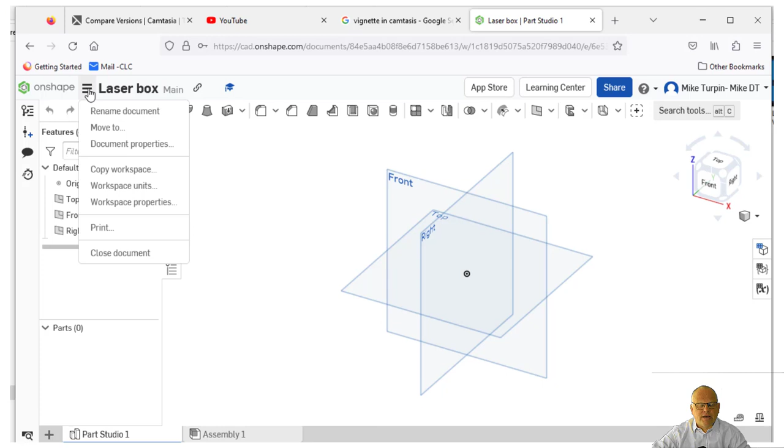Right, so I'm not going to do this as an introduction to Onshape. This is quite basic, you'll be able to follow along if you've used Onshape before. Just one thing that my students often get wrong is make sure your units of measurement are correct, and if you're not sure, you can click on those three little lines there and go to workspace units and make sure that you're working in millimeters. Anything else in there you might change later on, but for me that's the key bit, and then green tick it.

Right, so the first thing that we're going to do is look at our work planes, and I'm going to do a box with a drawer and a lid is what I'm thinking today. So I'm going to choose my work plane for my starting point, which is going to be my base. So I'll go sketch, I'm going to use the top work plane, select that, and then press N for normal, which means that I'm looking straight at it.

Now I'm going to draw a rectangle, so because I'm in a sketch, my sketch tools become available. I'm going to choose a rectangle, click and drag it out. Now again, I can set my dimensions as I do it. So 200, press enter, then the next one 150 and press enter. Let's have a look at that. 200 by 150, it's alright. I'm actually going to reduce that down. I'm going to click on that. Oh, sorry.

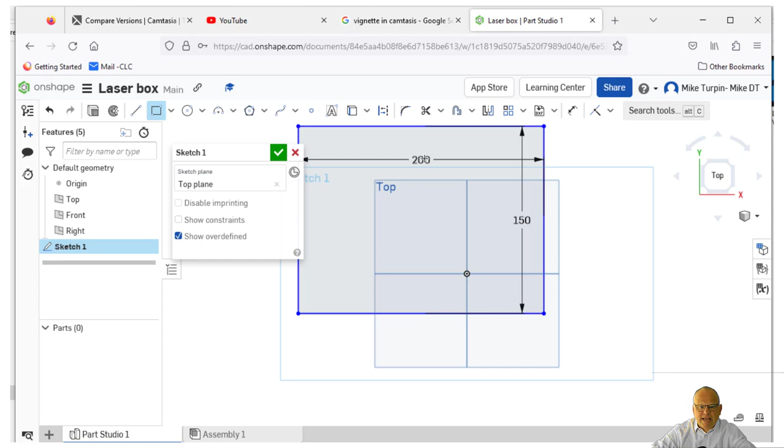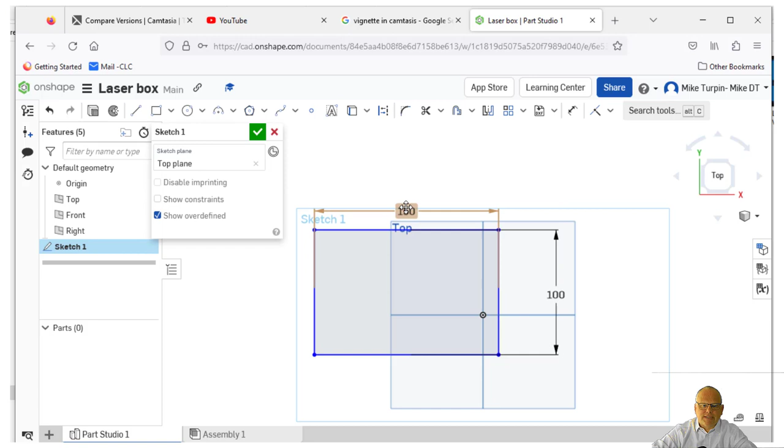I've looked at that and thought, do you know what, I don't like that, that's already too big. So again, within the tools, I can click on it and make that one 150, press enter, and make that one 100 and press enter. So I'm using the parametric tools and the dimensioning tools to get my box size right. I'm going to work very small. I'm imagining this to be some sort of storage for USB devices or a few coins or something like that. So 150 wide by 100 tall, and I'm going to green tick that.

Now what that's given me is a sketch on the left hand side in the model tree. Normally I don't bother naming my sketches, I'm a little bit lazy like that, but today I'm going to. I'm going to right click on it, rename, and call that base and press enter. So I've now got a sketch called base, and that's going to be important in terms of outputting for laser later on, but I'll explain that when we come to it.

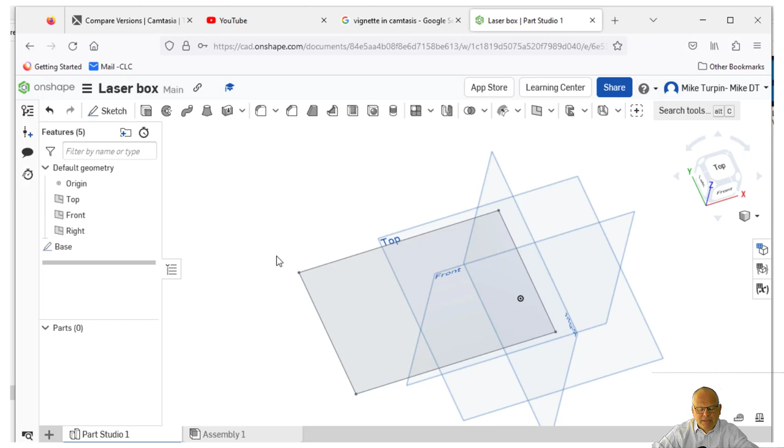Now because I'm imagining this to be 3mm MDF, which is a really good prototyping material for laser cutting, I'm going to use a tab building process. So I'm going to have slots and tabs that fit together. Now if I want the interior of my box to be 150 by 100, what I actually need to do is make my sides probably slightly larger than that. So I need to double check what I'm doing and think about your measurements a little bit.

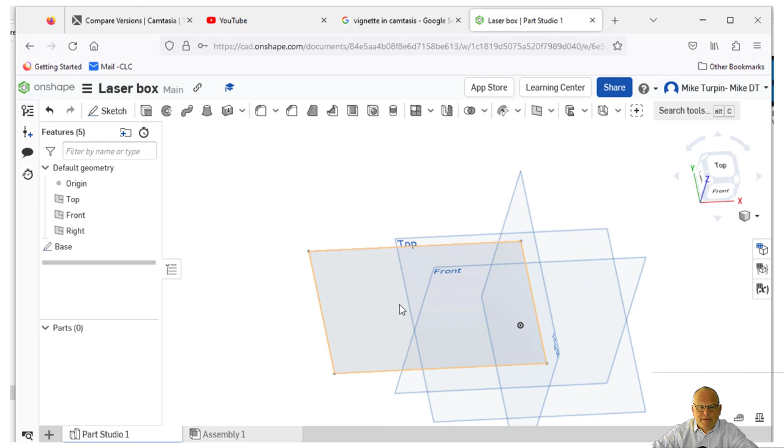Okay, so what I'm going to do, I'm going to go back into my base sketch, I'm going to go edit, I'm going to go N for normal, so I'm viewing straight on, and now I'm going to put some tabs into it. Now my preference today is going to be that I'm going to put tabs inside it. I'm going to draw it rather than talk about it.

Okay, so I'm going to actually click and draw a line in and draw a line out. Now there's a couple of ways of doing this. I was kind of mulling over the best way, but I'm going to do it this way. Now if I cut in my 150 and then I put a wall thickness in there, it's going to get a little bit smaller. The dimensions of my objects are going to shrink. If I want the outside to be 150, then I need to inset it. So it takes a minute to think about that, but basically all of my slots are going to be 3mm. I'm going to choose to come inside for simplicity today.

So I've drawn this rectangle, and I'm going to use my dimensioning tool to just come in and type 3. 3mm is the thickness of the material. You'll notice at the moment that I haven't put a dimension here. And then I'm going to do the same thing. Click, make sure I'm running at 90 degrees down there. Right click to escape my line. So I'm using my right mouse button. If I'm in the middle of using a tool, I can right mouse click out of it. 3 and press enter. So I've now got 2 steps, if you like.

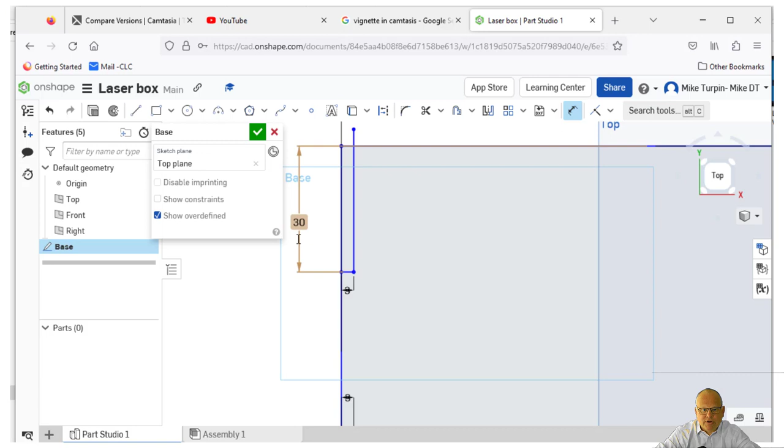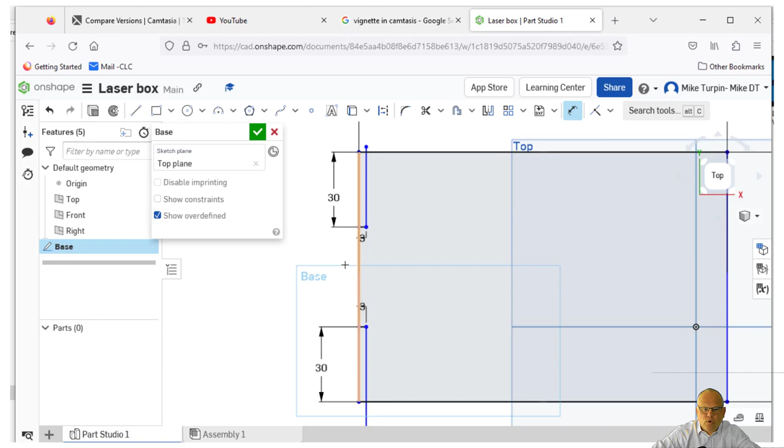I'm going to come down onto this one, dimensioning tool, click on that line, click on that line, and make that 30. So what I've got is a box with 2 slots which are 30 and 30. Now if I put another dimension on here, what you'll hopefully see, between that one and that one, is that we've got a whole number, no small points, and it's a grayed out one. That means that it's a driven dimension. So if I change the size of those slots, that will change automatically, driven by what's happening around it.

Now, a couple of ways I could do things. I could mirror that over on the right hand side, but for me, I think it's just as easy to do it this way. Now, what you might notice, if I come over to here, it hovers and it gives me a constraint that's going to lock it into position with that one. I'm going to click and drag in. Look at me enter the data now. 3, enter, click up, and then right click to escape that line. So I actually constrained that line there to be in line with that one there.

We'll do the same thing again. So go back to my line tool, tell the computer what I want to constrain against, click there, so it's locking off against that. Click there, type 3 to enter that number, and now come down. And then escape the line.

Now you might be asking yourself, why aren't I spending time getting my lines not overlapping? I'm actually going to trim this box afterwards to create the shape that I want. I wanted those dimensions, I wanted that 3mm thickness. The rest of it I'm going to trim in a minute using the scissor tool within this sketch. Now the next thing I'm going to do is put a slot in the back and in the front to accept the front and the back. So again I'm going to use my line tool. I'm going to click, drag down, press 3 and press enter.

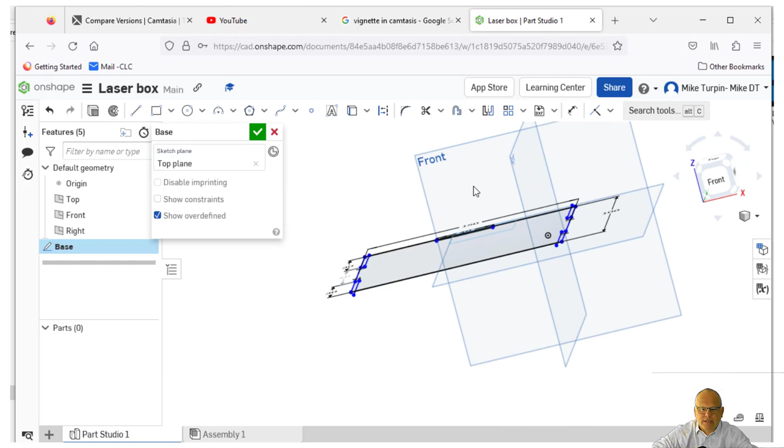So a little reminder, if you're watching me moving things around, middle mouse button down will pan, middle mouse button rolling will zoom, and then right click will allow me to orbit my object. Alright, and if I get lost I can do one of two things. If I'm in a sketch I can press N, or I can click on, in this case, the top of my view cube twice, and that will recenter me.

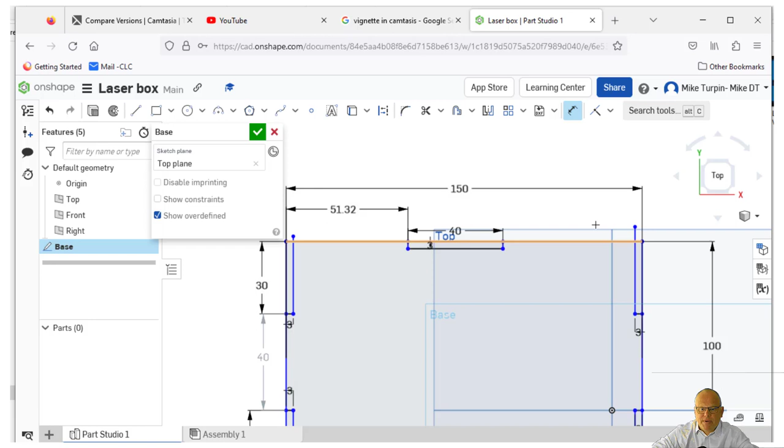So I've now got this slot here, but that slot could be anywhere left and right, so I'm going to position it, but this time I'm going to position it relative to this edge here. Okay, so let's have a look at what we get. Click on that edge, click on that edge. That's giving me 51. I'm going to OK that for a minute. Click on that edge, click on that edge, and that's giving me 58. Okay, so again, that's a driven dimension.

Let's make this 58. Okay, so 58 and 52. Right, let's make this 54. 54 and 56. Let's make that 55. Okay, 55 and 55. Now, you could calculate that using a calculator or using your head. Relatively easy maths. But actually what I wanted to do was to just show you how you can find a dimension by using the dimension tools. The grey one is driven, the 40mm slot was fixed, and the 55 is the position from the left edge in. Okay, quite a lot of information there.

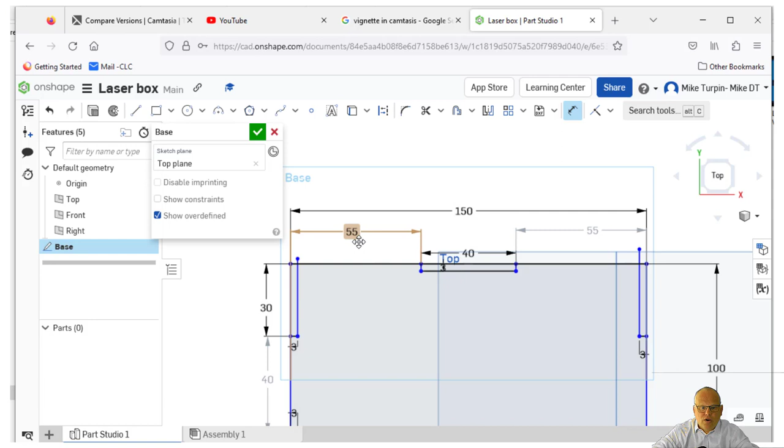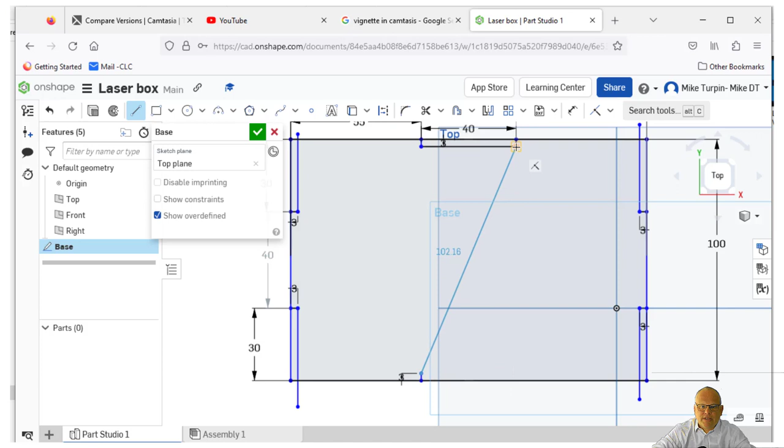And then I'm going to do the same thing over here. Now again, I could use mirroring tools and all sorts, but I'm going to use this align constraint. I'm coming up, click, press 3. Going to come across, look at this, I'm going to align against that one, click, and then I'm going to come down 3. And then right click to escape the line. Okay, so that's now giving me my slot in the middle that lines up with this one. I'm going to show you hopefully in a minute how that's constrained.

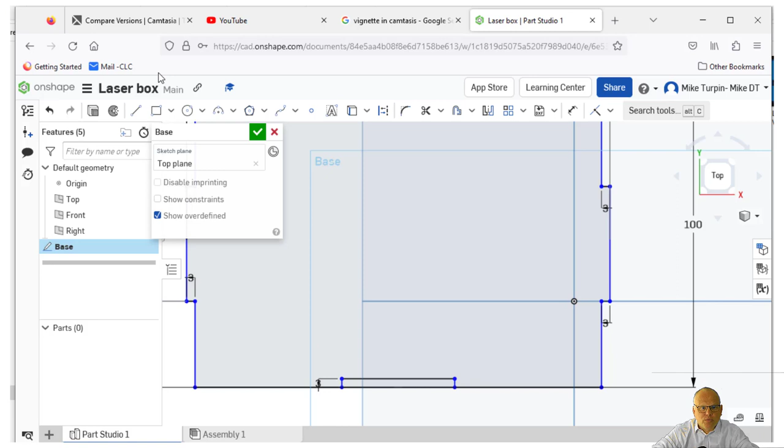But let's now use the trim tool here. So using this trim tool, I'm going to trim out this corner to create that step. Same thing over here. Let's do the same on this side. Okay, so just looking at my lines, zooming in. Now, just going to escape the trim for a second with the right mouse button. If you accidentally got rid of any extra lines or anything, that's not a problem. You just redraw them back in using the line tool, or the other option is to use the undo feature over here.

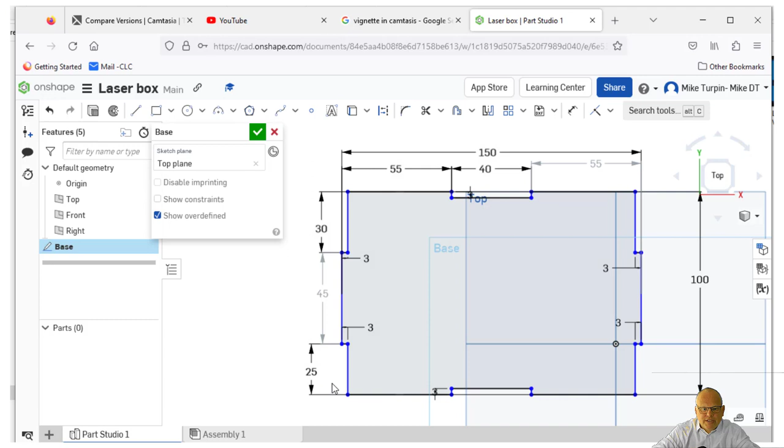A slot 40mm wide there, a tab 40mm wide there, that's coincidental. I've got a gap of 30 and 30, it's all constrained. Let's just change one of these for a second and hopefully you'll see something happen. You don't need to do this. Change that to 25 and press enter. You'll notice that that gap there and that gap there have remained at the same level. They're both at 25. This tab has become 45. Remember that was 40 a minute ago. So it's stretched to accommodate that size. Let's make it 35. Everything moves. So now that slot in the middle has had to shrink because it's a driven dimension. Okay, so that's worth just having a little bit of a look at.

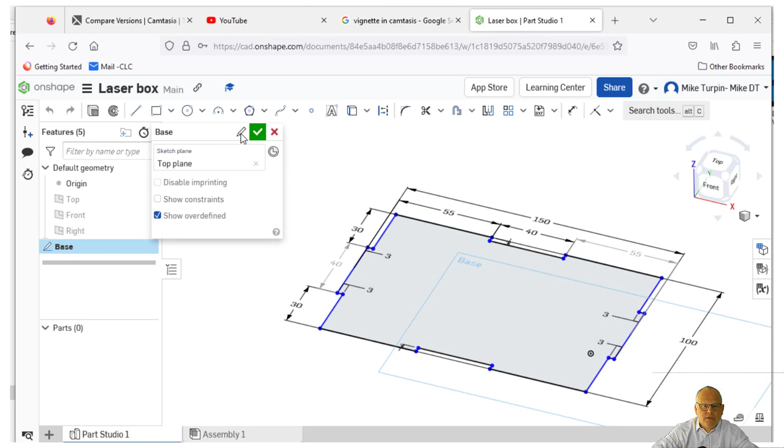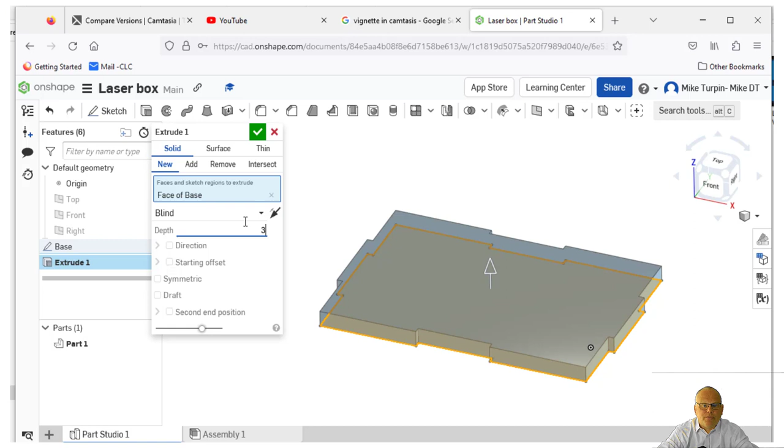So this is now my base over there, and I'm going to tick it. I'm just going to turn off some of the visibility of these because that gets a bit confusing, doesn't it? All right, so that's the base, if I right click and edit, drawn on the top plane, so that's facing up and down. Now the next thing we're going to do, we're going to turn that into a three-dimensional object. So we go extrude, and the computer says, what do you want me to extrude? You select this face, and you can pull it around if you're exploring, or I know that I'm working with 3mm material, so I press 3 on my keyboard and press enter and green tick it. Okay, so that's now my base part.

Now I'm going to use that hopefully as a top and a bottom, but what we'll start by doing is just using it as the base. So that's that part there. There's the sketch. Now the next thing we're going to do, we're going to do a sketch on the left hand or the right hand side. So I'm going to go sketch.

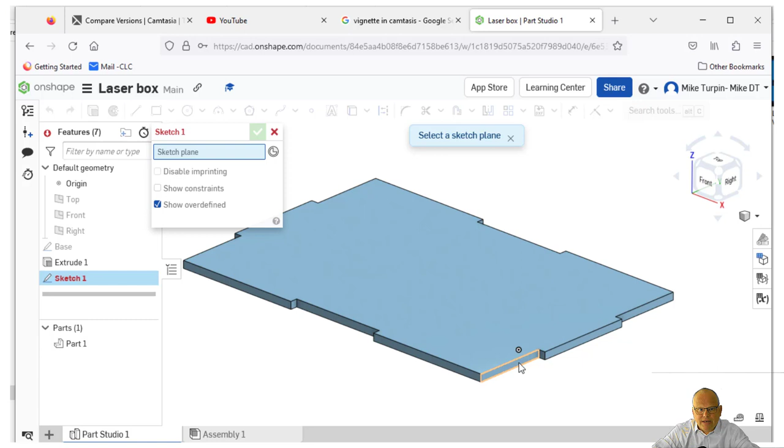Now sometimes we sketch on work planes, but now I've got an object, I'm actually going to do my sketch here, on that plane there, the plane of the object. Okay, and then press N for normal. I'm going to delete that and do that whole process again. So there's my object. I'm going to draw onto the side of it. I go sketch, zoom in, click on the side of it, press N for normal, and now I'm going to do my sketch here.

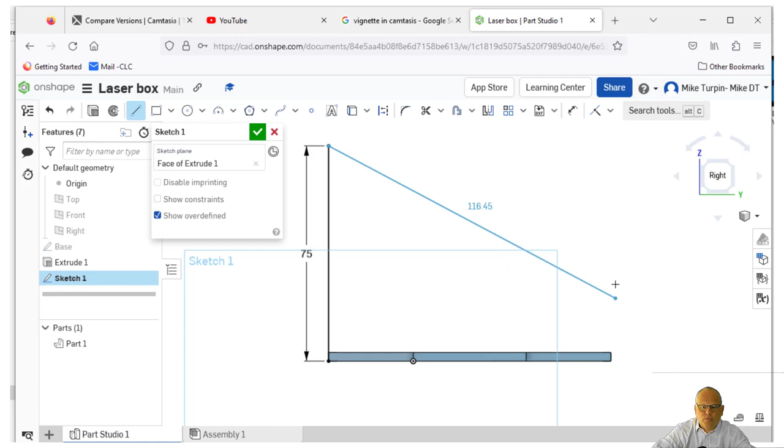So, line tool, I'm going to click at the bottom, I'm going to draw up to give me the height of my box. Let's put a number in there, let's make that 75. I'm going to come across, and I want to come across until I'm lined up with the opposite corner. And so Onshape's doing me the favour of giving me that constraint tool, and that makes it 100. And then I'm going to come down to the bottom corner here.

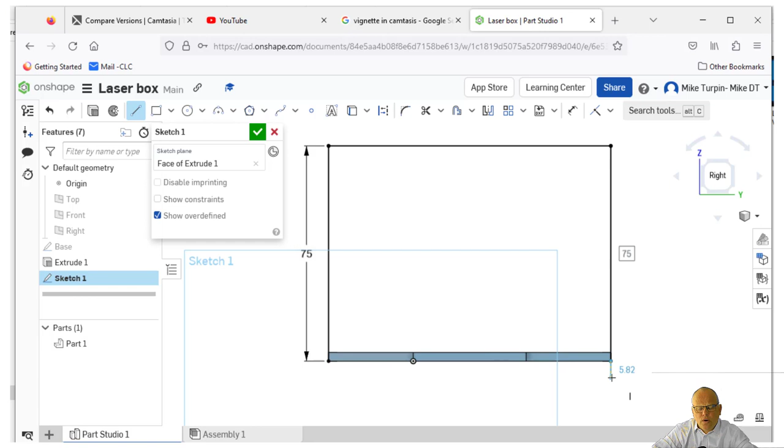Right, so I've kind of got a rectangle. I could join that up and then go through that process that we've just done. Or what I can do is I can come along and click, zoom in, click, click, click, and click. Okay, so I bet you're really annoyed listening to me say click that many times. I'll try not to do that again.

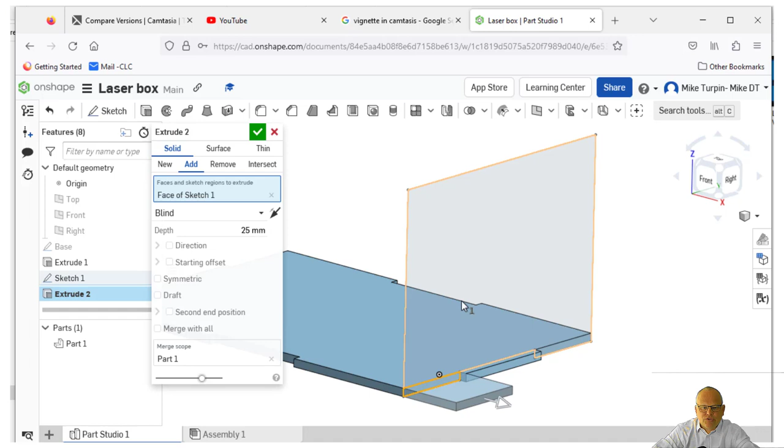What I've done is I've come up from that edge, gone all the way across, gone down, and then I've followed the profile of this tab on the sketch. Then I've closed the sketch up. So if I just green tick that for a second, and go to my extrude tool, and make sure I've got all of those bits selected. I'm not sure why it didn't select that then. And I need to make sure I'm going to new.

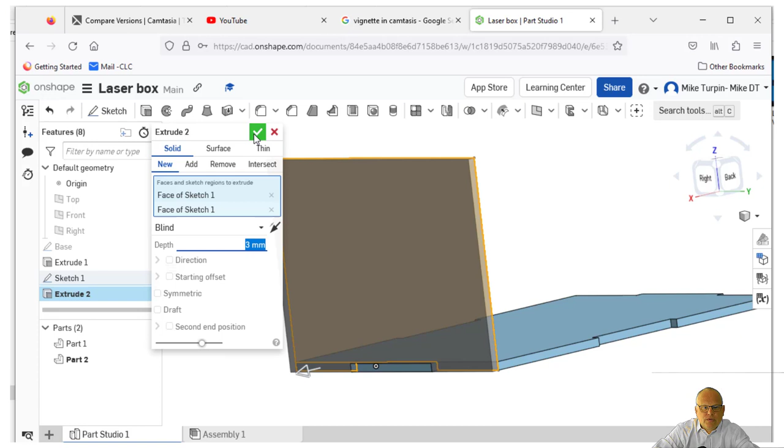Usually, quite often we'll do add. If I go new, it'll make it a new part. Now remember, we're working with 3mm MDF. So if you look at what I've got there, green tick it, that's my new part. That's worked out quite well, it's quite neat. Okay, now I know I'm going to end up having to do some other stuff in here as well, but that's not a problem for a minute.

Remember, we're going to have a sketch which has got a name, and I didn't do that a minute ago. We've got a base sketch, our sketch that we've just used for our extrusion sitting over here in the model tree. If I wanted to edit that, if I go edit, I can come back into it and make changes, which I will do in a bit. But if I want to rename sketch 1, I'm going to right click and go to rename, and this is going to be called side. Press enter. Okay, so I've now got a base sketch and I've got a side sketch. Nothing's changed, they're just renamed.

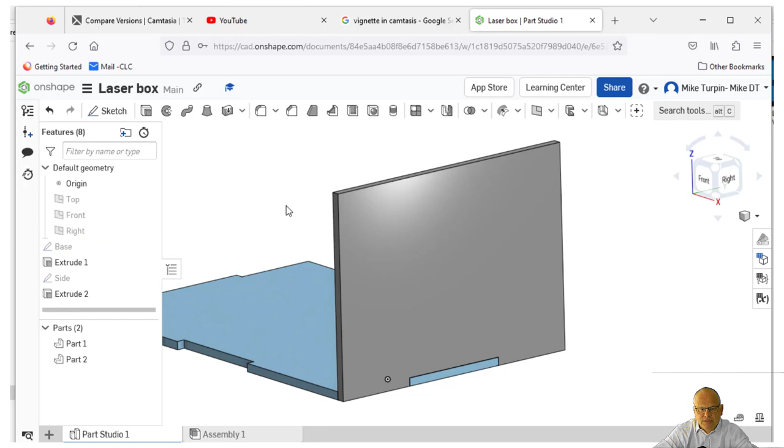Right, now I'm going to do a back sketch, but before I do that, if you look at the object, and again, this is your iteration, your prototyping, what you might want to do is screen grab at this point and go, okay, I've realized I need to put an extra slot in. So now I'm going to put a slot in the middle of this section here. All right, now what I might do is use the measure tool to work out what the middle of this section might be. Not from the very bottom, but maybe the middle of that section, just out of interest. Let's do it that way.

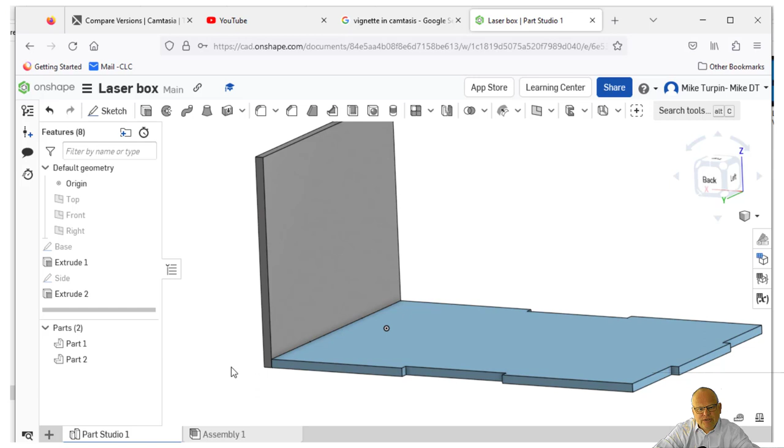And I can use my measure tool that hides down in that corner, and if I go to that point there and that point there, that's telling me that that distance is 72mm. Look at where I'm measuring from and measuring to. It gives me all sorts of other things as well, but that'll do me. So I now am going to create a slot inside one. If I go edit side one, so overall it's 75, but we want this slot to, let's make that 30.

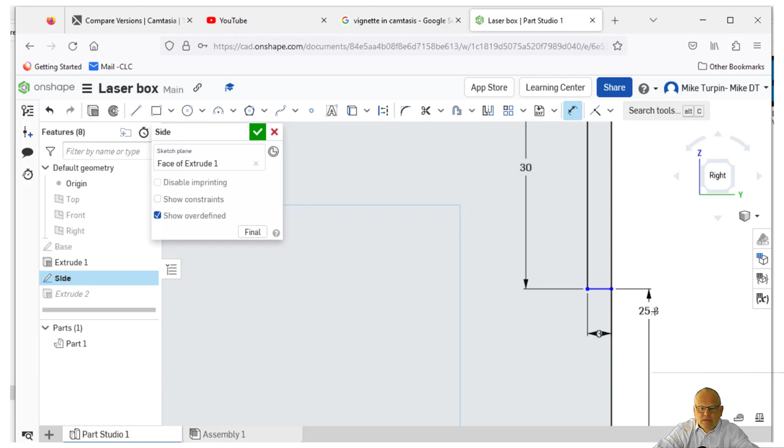So I've got a slot there, 3 and 30. And I didn't worry about the positioning of it yet, because I'm going to actually position it using my dimensioning tool from this bottom edge to there. Okay, so let's make that 25 for a minute. I quite often plonk a dimension down and see what I get. Okay, so we've got 25 and we've got 30.

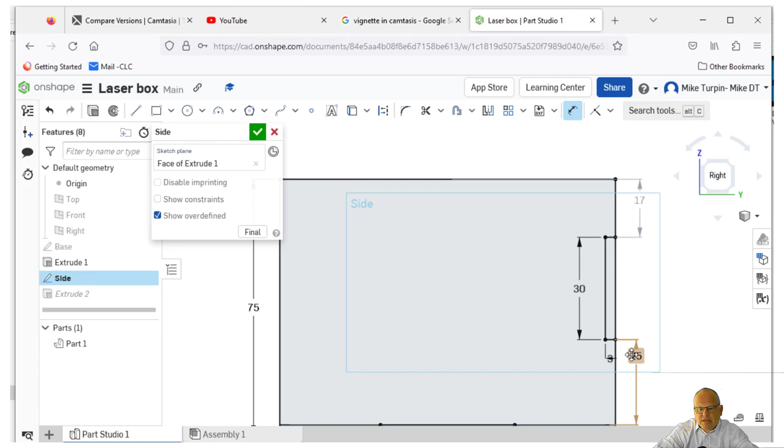Okay, now remember, in order to get it in the middle, we need to find that comfortable spot, and it's only going to be 72 wide. 72 was the distance we had, sorry. Okay, so if we look 25 and 17, let's look at finding a number that works for this. Let's make that 20 and 22. We've got 30, so the obvious thing to do is to make that 21, isn't it?

Okay, now if you think about when you were drawing this, you wouldn't come up with 21 as a number, would you? And that's the great thing about exploring your designs in 3D CAD, is that it gives you a chance to have a bit of a look at things and work things out. Now I could have made that slot smaller, so for example I might have made that slot 25 to give me some bigger tabs. Doesn't really matter.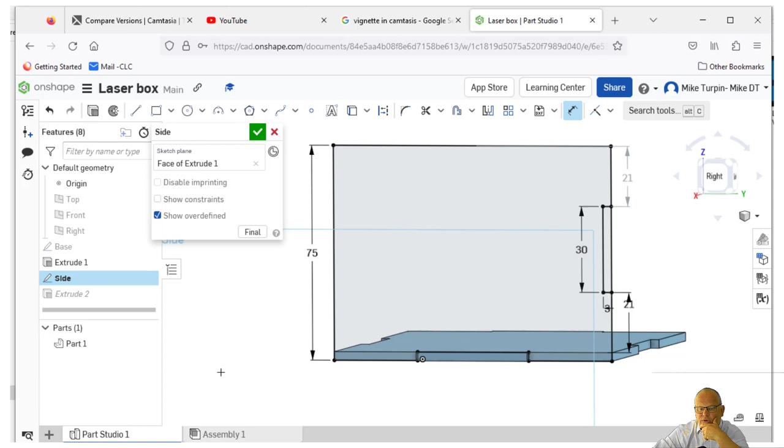Okay, the downside of this is that if that's 75, this slot is not going to be in the middle of 75, it's going to be in the middle of 72, because that's that distance. For me, that's absolutely fine. But you might decide that you don't like that. That could be one of your design decisions.

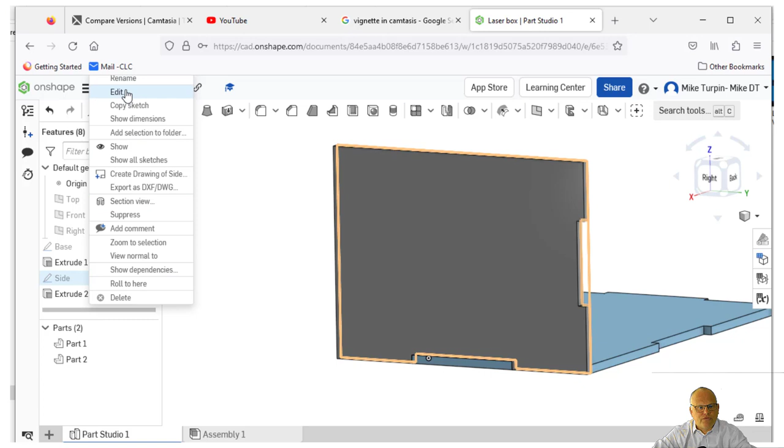Okay, so I'm going to green tick that. Okay, now we've got that slot cut out. It's done that automatically because I'd already got an extrusion there, so it's updated my extrusion. But let's go back into that sketch again, because I've missed out a tab that I'm going to put on the front. So if I go into my side sketch, right click, edit, okay, N, view normal onto it. I need to put a tab on this side to make this a box.

Okay, so I'm going to line it up with that, constrain it, click, 3, press enter. Did promise I wasn't going to say click every time I clicked, didn't I? I won't do that.

Now let's get a dimension on this one and we'll see. Click on the line, click, press enter. Driven dimension. Hopefully you now know why it's a driven dimension. Go on, think about it. It's because I used the constraint tools from this object here, which means that whatever I do now, it's always going to line up. And then I'm going to use my scissor tool, which I didn't do on the last one, so it was interesting that it did that extrusion, I wasn't sure, and trim those 2 bits off. Okay, and then green tick it. And you can see now, fully extruded side piece.

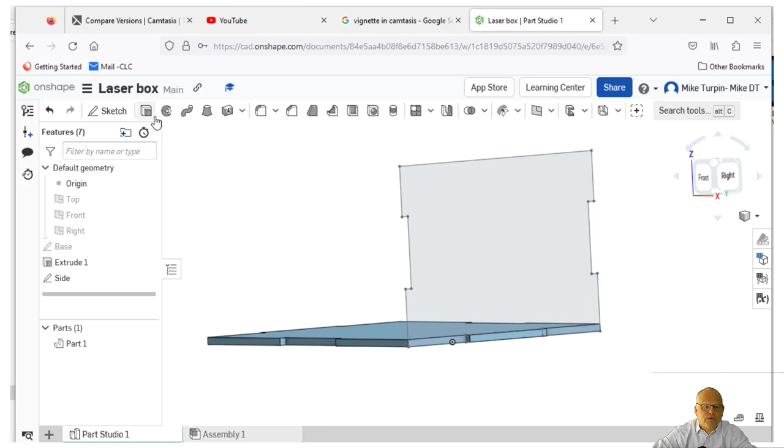Now, if that extrusion didn't work out or whatever, what you could do, that extrusion there, Extrude 2, is linked to the side. I could delete that entire extrusion and go, hang on, that didn't work, why didn't it work? And then do a new extrusion. Okay, let's make sure we picked up that part there, which seems to be causing us a problem.

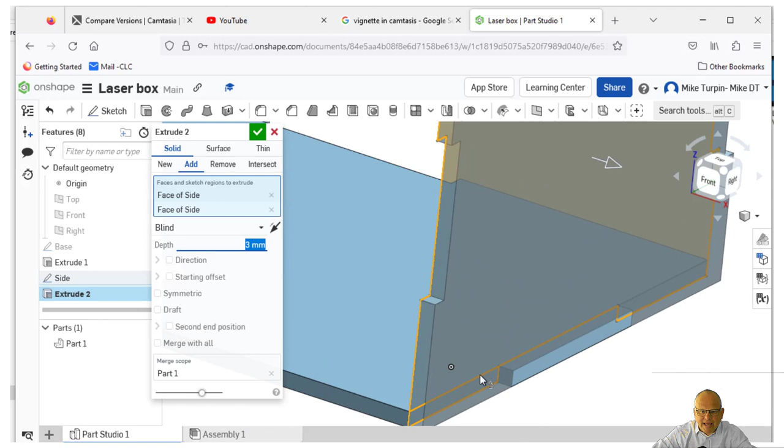If things go red, don't just ignore it. It's going to be some sort of hint that there's something wrong. And in this case, I can see it there, in that sketch, a line that I haven't deleted. Now that's probably important. There's another issue there, hopefully you spotted. That's probably important to our laser cutting. So I'm just going to go N for normal, and this is the line here that seems to be throwing us up a problem.

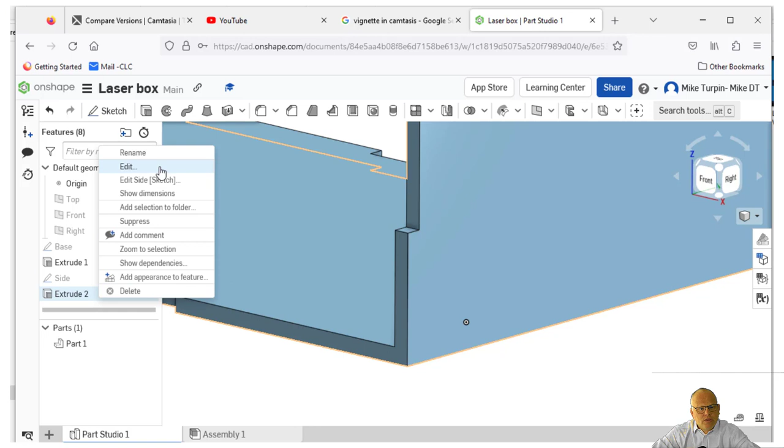So I'm going to delete it, although I'm not sure that it's really showing up on that sketch, but I'm going to get rid anyway. If it doesn't go, then that's fine. Yeah, it's not giving me the option to delete it, so it's actually not appearing in that sketch. So I'm not sure why. So look, my extrude, it needs to be new, not add. New. And then green tick. So that's a new part.

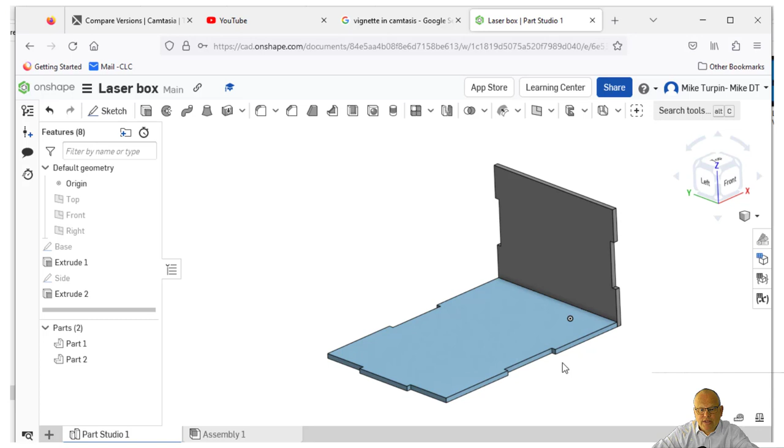All right, now, so we've got a base, we've got a side. Right, so we're going to do the back shape now, or the back or the front shape. I'm going to do that using this sketch here. So if I go sketch tool, I'm going to choose this interior face here. Press N for normal, so I'm viewing straight onto it.

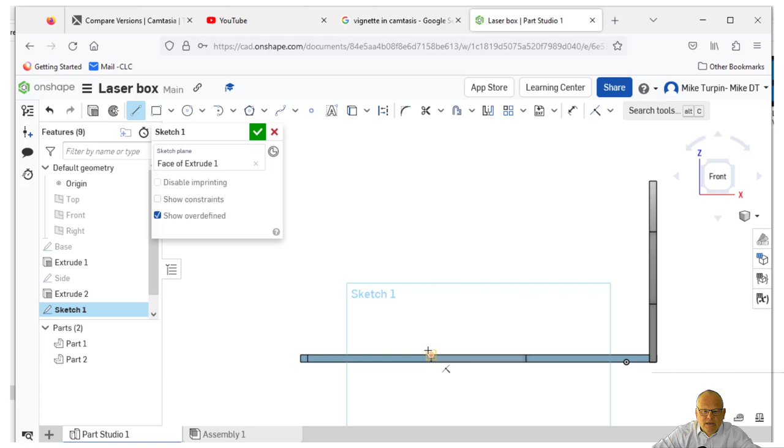And now using my line tool, I'm going to start my sketch here. It seems to want to, so I'll go with that. Click there, and I'm going to come down and follow the sketch profile of the objects that are kind of highlighted, and I'm going to just follow this contour. It's a bit like tracing really, and what it'll do is it will lock into position as I'm doing my drawing.

And I'm going to just line up with that bottom edge there, hopefully. Don't think it's going to allow me to do it actually. Right, what I've done is I've drawn a line. I haven't actually put a dimension on it because I want to find an alignment with this one here.

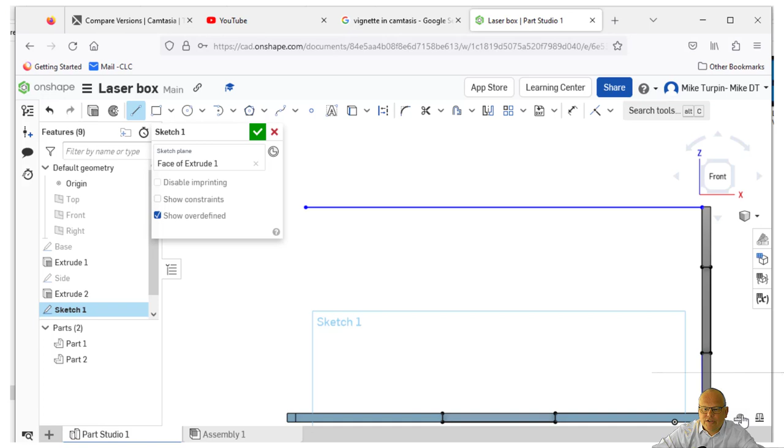Right, and if you look, I can't actually see that, so it's not giving me. I was hoping it would give me a kind of a highlighter. So I'm going to use my measure tool again. It's not very convenient. I'm going to measure from that corner there to that corner there. Sorry. It didn't do that then because I was locked on a line tool.

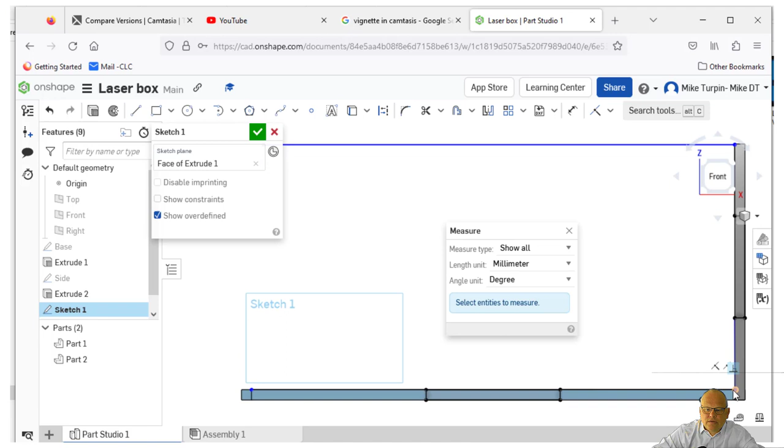So my measuring tab, from that corner there to that corner there, 144.14. I'm going to put 144 in this. So I'm going to just click on that line, dimension tool, and make that 144. Press enter. Now hopefully, all being well, that will actually line up with that mark there. Click. There we go. Okay.

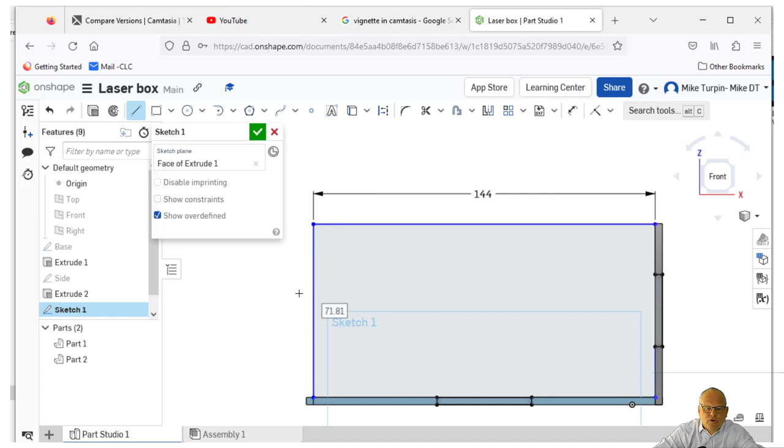So what I drew, and this isn't actually correct, this sketch yet. Okay. So I started there. I've come down, across, up, across into that corner, followed that around, and what's missing is that profile tab on that side, and also this line here. So I'll just join that line up there for a second, and then I need to add in a kind of a sticking out tab. You might call that a tenon, I suppose.

So with my line tool, I'm going to line up with that. Click, drag out, make that 3mm. Line up with that one. Okay, so I've got this tab sticking out here. I've now got one that corresponds with it that uses the same dimensions, and I can use my trim tool to get that profile right.

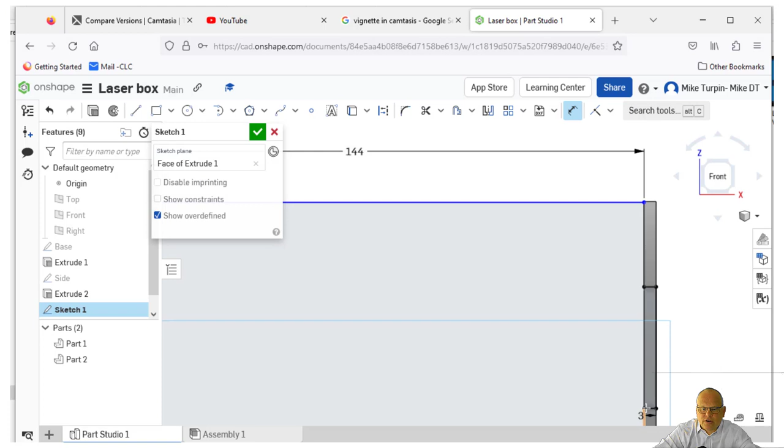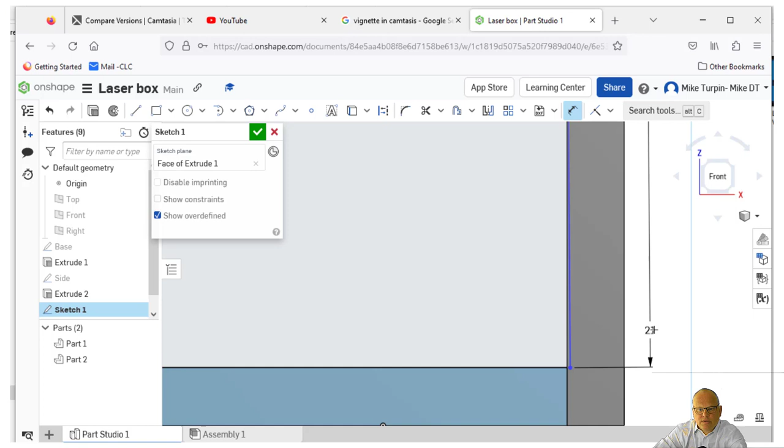I'm just going to stick on a dimension so that if I chose to change it later on, I know initially we've constrained it, but it'll allow me to see what I've got. Forget that the middle mouse button does that sometimes. Ooh, doesn't like that. What we've got there is probably a very small, yeah, so that's my misalignment, isn't it? Just deleted that part of the line.

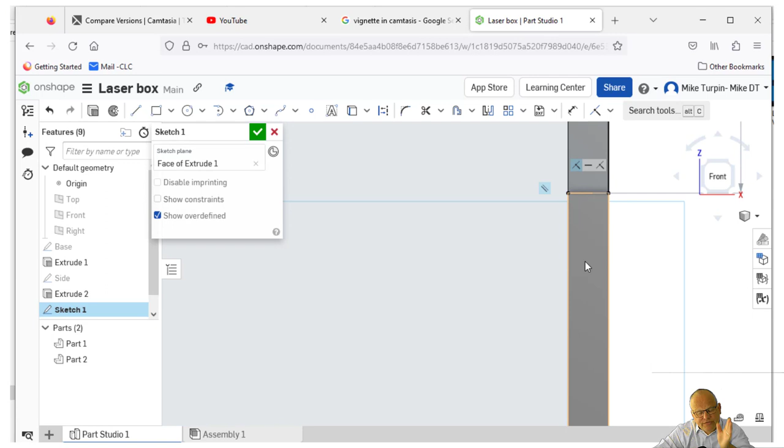I'm sort of making the decision whether I leave this in the video or not, because I think it's quite important that you learn to troubleshoot. So what I've done, that line, when I was first drawing it, it was slightly wonky. It locked on quite nicely there, but it wasn't enjoying locking onto the bottom bit, right? And what it's done is this bit, when I zoom right in, you can see it's overlapped where I thought it was. I thought I'd got it right.

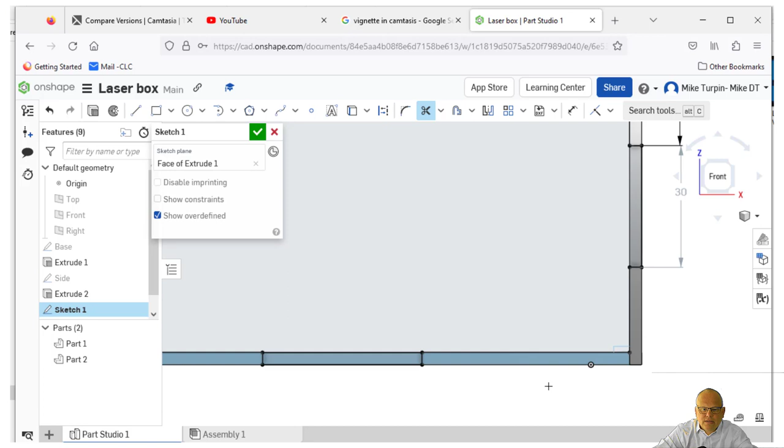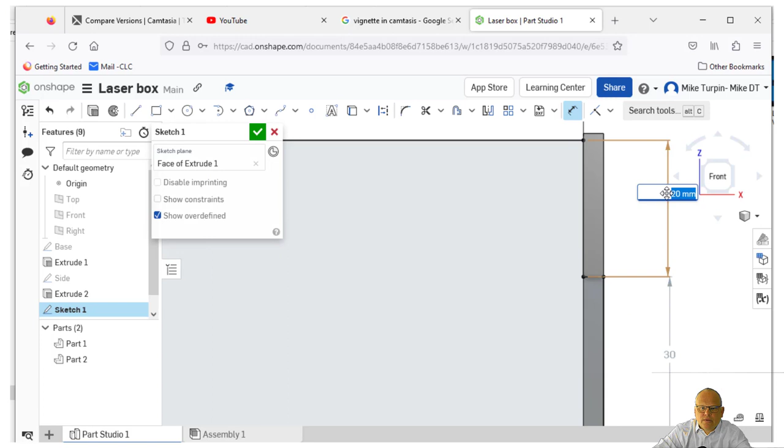So I've deleted this top line, and I've redrawn a nice vertical line, and now I'm going to use the trim tool there to delete the two overlaps, hopefully. Right, now. Yeah, so I've got my line there. So if I now dimension that, that was what revealed it to me. Yeah, I've got two driven dimensions, a 20, a 30, and a 21. Let's make that 20. Okay.

So by going back, just doing that double check and putting those constraints on there, it showed me an error. It allowed me to fix it before I went too far. And because I'm in this CAD package, it allows me to make adaptations, and that's really important. Okay, now look, it's done something funny over here, isn't it? That's made that wonky. So again, I'm going to just delete the section that's causing me a problem. I'm going to put a dimension on here just to check that's coming out correctly, which it is.

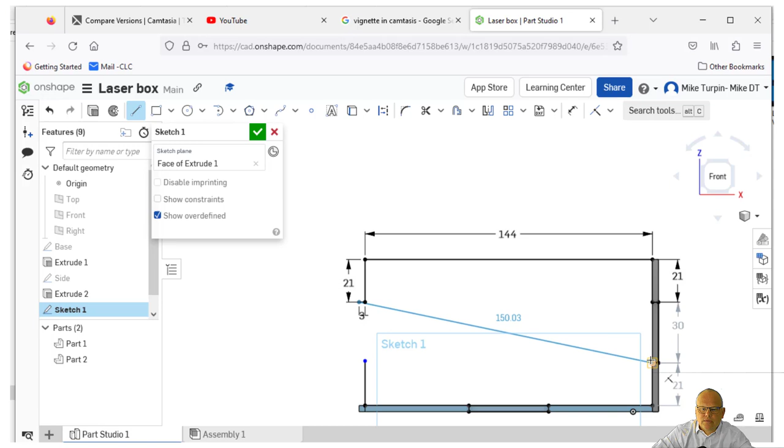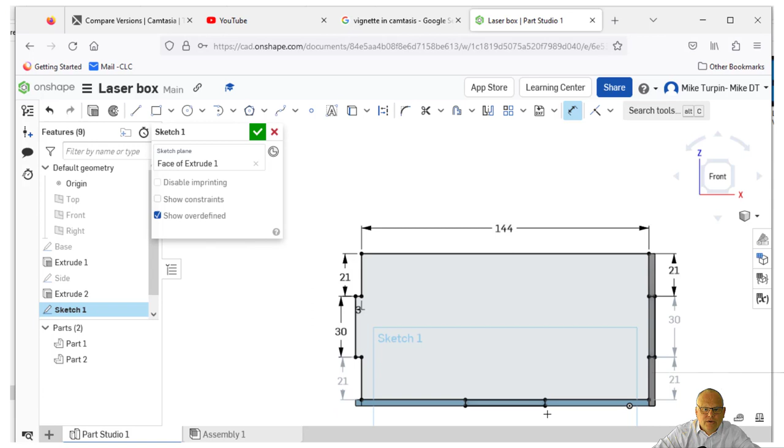Okay, and now using my line tool, and now hopefully this driven dimension here will come out as 21. Yeah, so that corresponds, that makes sure that my tabs are in alignment correctly. Alright, and then I'm gonna green tick it, and finally extrude. Okay, we're gonna make sure it's a new part. We're gonna use 3mm, and then we green tick that there.

Now, when I was doing my extrusion, I didn't select that tab bit at the bottom, so we'll come back into that extrusion, edit, and make sure we pick up that bit of the sketch that we did, and that's now included. Okay, so we've got extrude 3, sketch 1, side, base. So sketch 1 needs to be renamed. Edit.

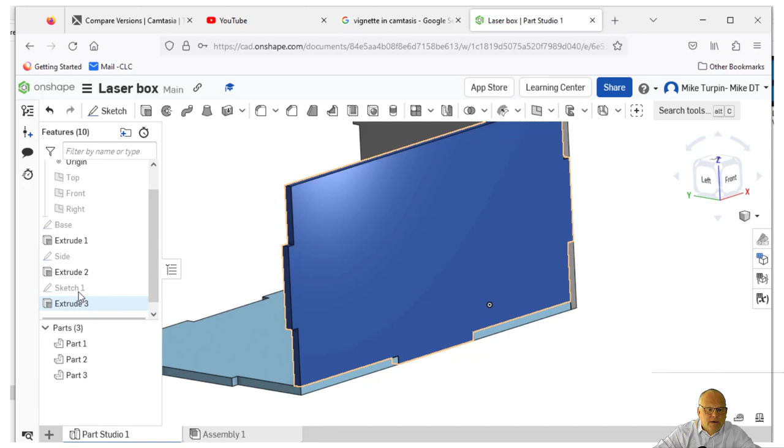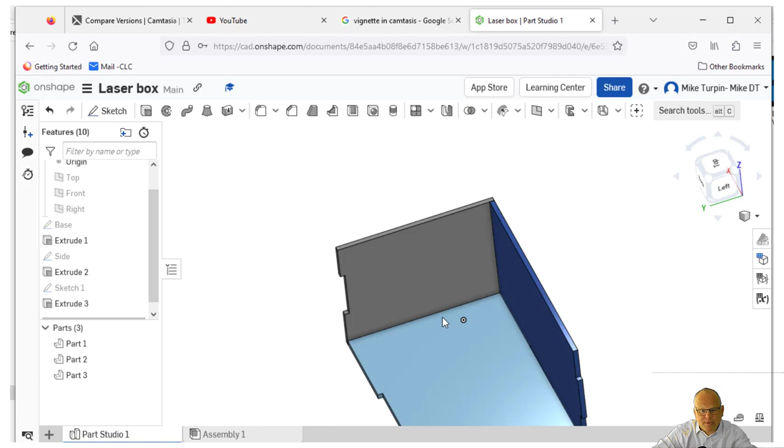I'm just going to go back into sketch 1. Sorry, I think what I've got is I haven't deleted that part of the line in sketch 1. Okay, and there it is. And again, because remember we're working for laser cutting, you've got to have what I would know as a valid profile. It's got to be a decent profile, and where you've got overlapping bits that maybe shouldn't be there, they need to be fixed rather than ignored.

Right, 36 minutes in, you're doing well. Now the last bit on this, so let's say we've got a side, a back, and a base. Now I need to make sure that that is renamed as back.

Okay, so here's the slightly weird thing. If we're going to go and put this together as a box, we actually need to do that in the assembly. I've drawn them together, okay, but in the assembly we're going to just bring those parts in. So you've got a tab automatically created. I'm going to go insert. Now if I had an assembly put together already, I could bring an assembly in, but I'm actually going to bring in each of these parts individually so that you see it.

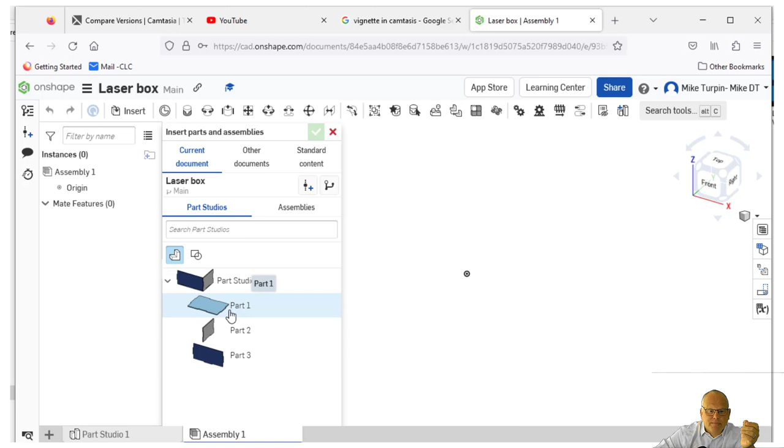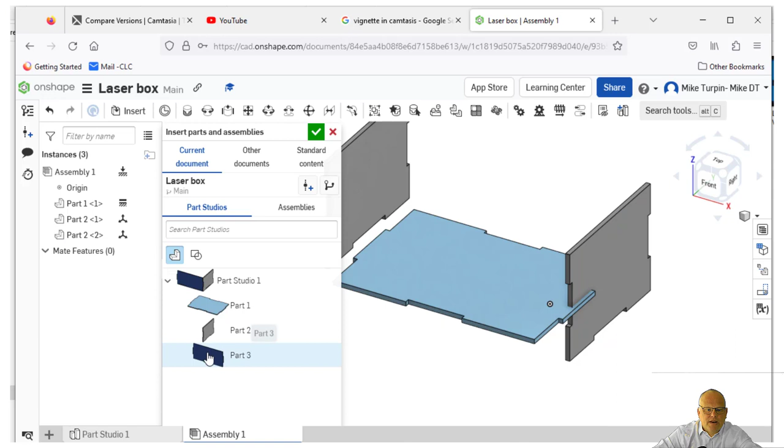Click, that brings the base in. I'm going to right click and I'm going to fix it before I do anything else. And what that means is that it won't move. Then I'm going to bring in part 2. And I'm going to bring in another part 2. And then I'm going to bring in part 3. Right, I'm not going to bring in any more for a minute, so I green tick that.

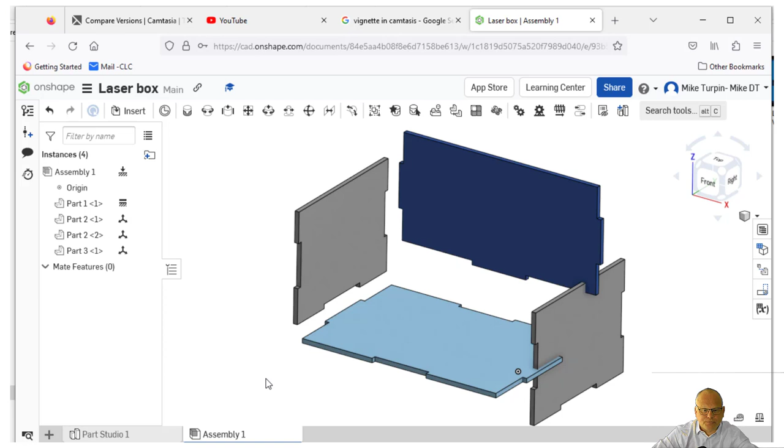Now, the funny thing about assemblies is they get a bit tricky, but if you hold your nerve, it will work out absolutely fine by doing the same thing. So remember, one of the first things I did, I right-clicked and I fixed the base. I could unfix it, but I want that to be the thing that everything else locks into position with. So now that I've got the base made, I'm going to use my planar mates to lock things into position. So let's do this face here first of all.

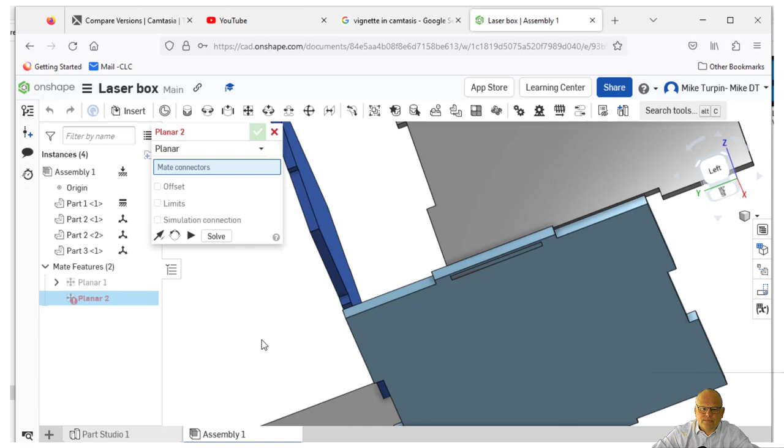Okay, so right mouse button allows me to scroll around. I'm going to use a planar mate. Plane is a surface, a flat surface, a plane. I'm going to click on that, and I want that to lock onto the top of this object. So I just hover around and it's now locked onto that. Okay, but it can still move. It won't move up and down, but it can move left and right. So the next thing I'll do is, if I zoom in here, I'll choose that face there, and I'll lock that against that face there.

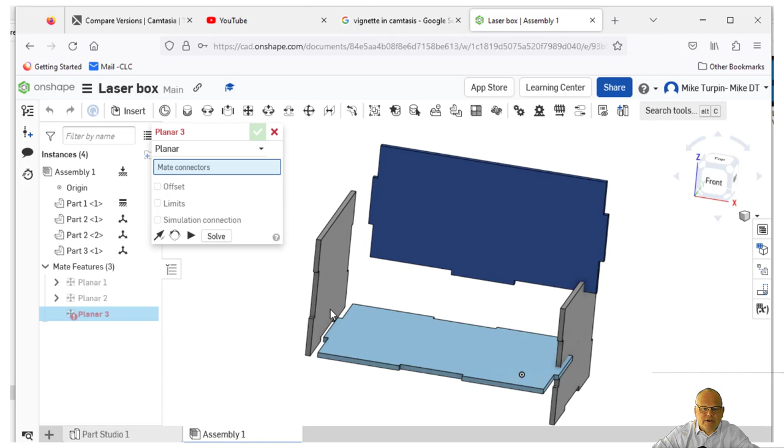And you might go, well, that's perfect, that looks alright, locks in nicely, but let's just zoom out and have a look at what happened. It can still move in that direction there. That's the only direction it can still move. So that tells me I need to go and lock that face there against that face there. And then solve it. You just saw one of the things that I really dislike about Onshape. Sometimes when it's doing mates, it kind of misaligns them as part of its preview. I don't like that, but you get used to it.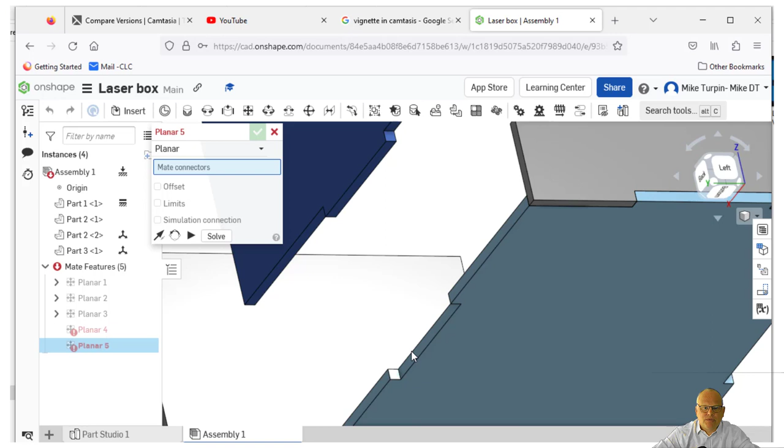So now that it's given me those three mates, I can solve it and green tick it. Okay, that's now locked into position. I can't move that, and I can't move the base because it's fixed. Everything else is movable. Right, so we'll do exactly the same thing, but we'll move the back in now. So we go planar mate. Let's choose the bottom of that, and we'll lock that to the top of that. Okay, but remember, it can still move that way, and it can still move that way and that way.

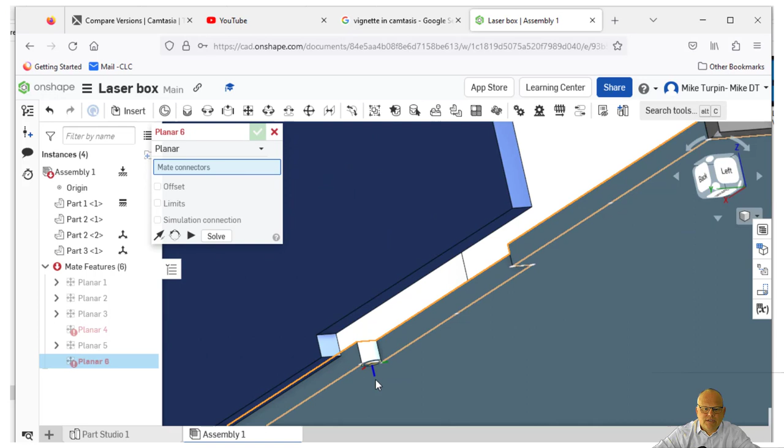So let's choose now to lock it into the slots. That one there, and we want that to lock against that face there. Solve that. So you go, oh, that looks good. So let's just check it.

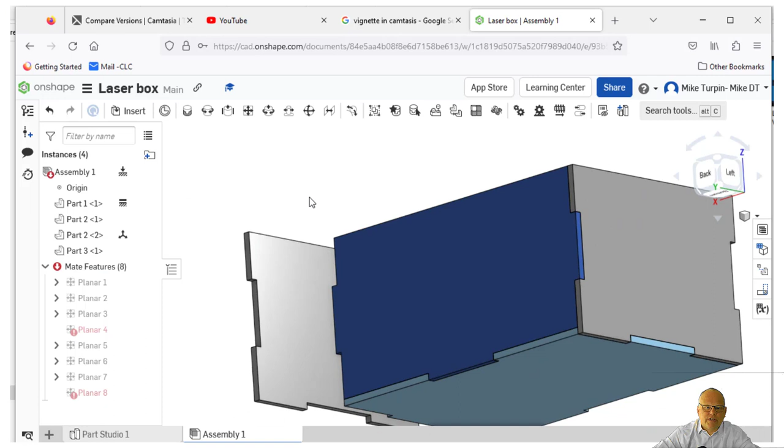It can still move in that direction there. So what we need to do is we need to lock that face against the inside of that slot. Green tick it. Solve, green tick. So we've now got an object which has got a back locked, a side locked. So literally the same thing again. And one of the things that people struggle with in Onshape is that there's so much that you could do, but actually all you need to do is the same thing pretty much each time.

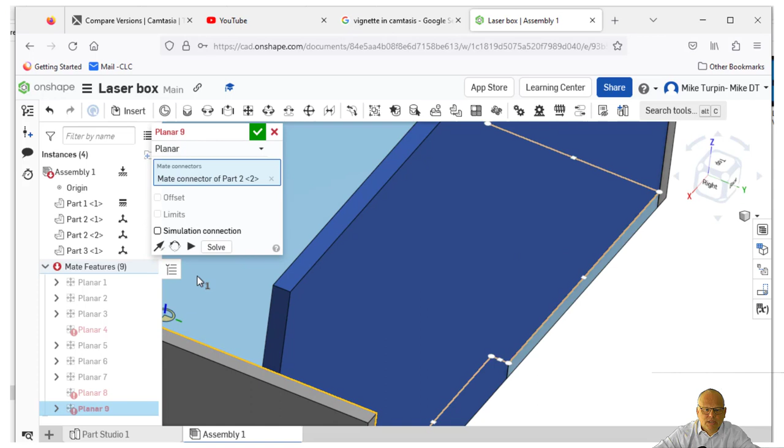Lock that to that. Look at what's moving. We'll lock that to that. Green tick that one, and then it looks like it's right, but obviously it can still move that way and that way. So we'll just zoom in and we will lock that one to that one.

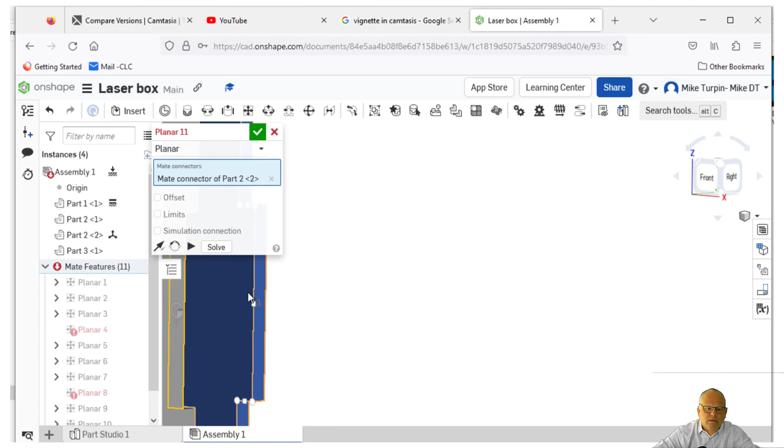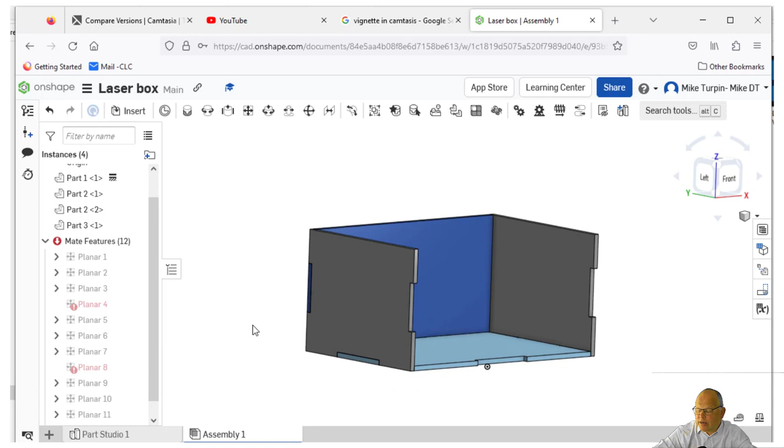Okay, so there's my box. Now what it's missing now is the front. So we'll solve that. So I didn't bring in the back, so I'm reusing that component. But if I go insert, part 3, exactly the same as I've just done.

If you find things are really, really out of whack when they come in, you can use this tool here. You double click on a part, and looking at those arrows, they'll give you a guide about how you can move it. So if you need to get it vaguely in position before you do your maneuvering, you can do.

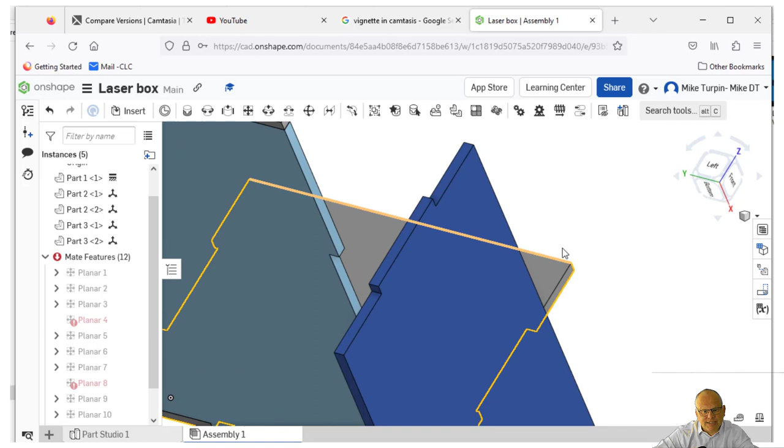I would say be a little bit careful about doing that, because it's very easy to think you've done a really good job of moving something and it looks right, but actually if you haven't constrained it in your object, in your assembly, then it's going to be wrong down the line. So don't use that and just go, if it looks right, it is alright, because it won't be.

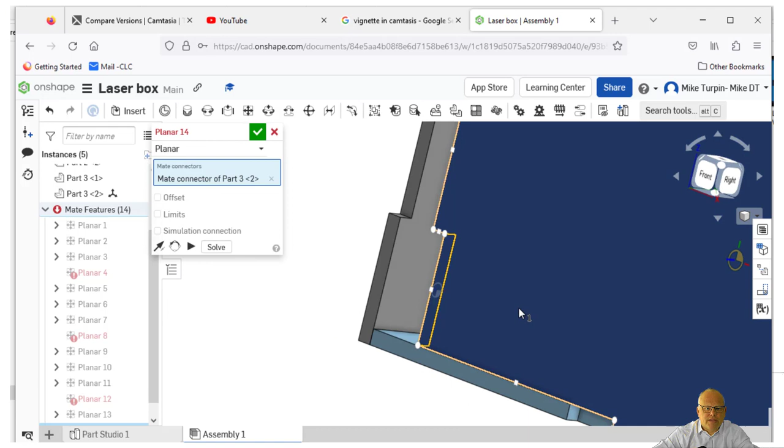Right, so what I'm doing is I'm working my way around with the planar mate, just checking that things are locked in position correctly, looking for where I've got a range of movement. This I think is one of the bits that really takes a bit of getting used to. I think it's quite tricky.

So don't be afraid of, sometimes I'll delete a whole part and bring it back in and have another go at those mates, because they can be really, really tricky, particularly at Key Stage 4 if you haven't used it very much. So don't worry if you struggle with this a bit, but do practice it, because this will really make a difference to what you're doing. Okay, so there we go.

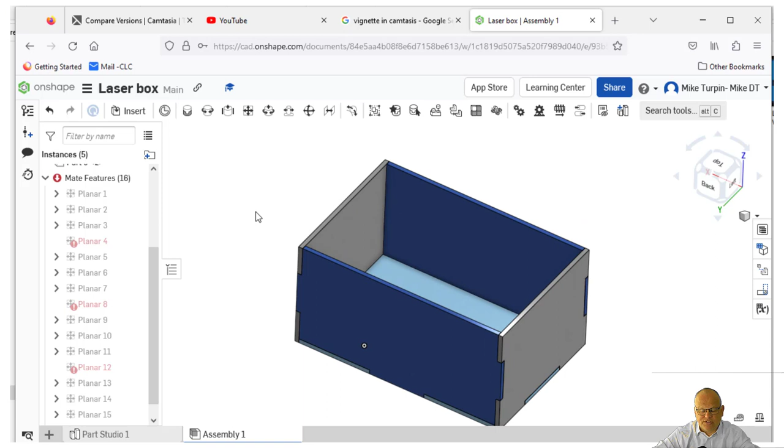And that's a box. All right, now what I would like to do, I'm conscious of time, that's 40 minutes, and I'm conscious that all we've made is a very simple box, and you might go, well, 2D Design will do that better. But we've assembled it, we can check it, and we can keep iterating, we can keep going from design 1 to design 2 to design 3 and seeing how it looks in our virtual prototype.

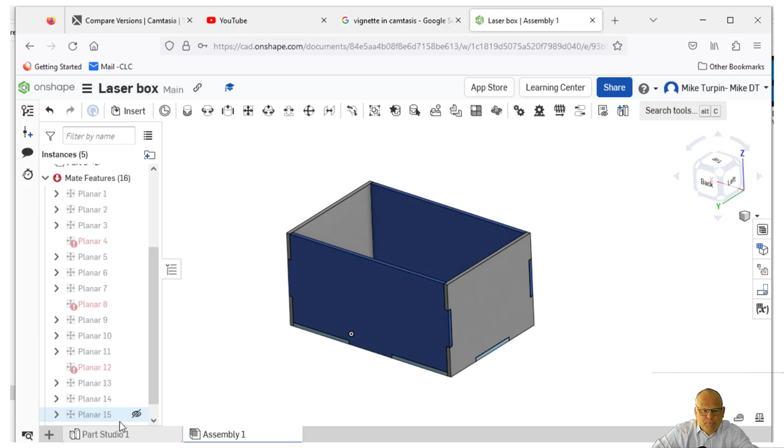And remember, you screen grab this, you put it into your NEA folders, and yeah, okay, so it's taken us 40 minutes to draw a simple box. But let's go back to our part studio here. We've got base, side and back, and what I can do with that is open up 2D Design, for example, and import my DXF file. But I'm not going to do that. It's whatever you might use, Lightburn or something like that in your area.

But I can take each of my sketches, base, side and back, that I drew, and I can right click and I can export as a DXF. Worth noting here, part 1 is, let's rename the part 1. Let's call that base part. Right, your sketch is not the same as your part. That I can export. If you look at the options that I get, export as a DXF or a drawing. We're going to want DXF.

If I go to my part, I get the option of export again, but this time it's a 3D format. And probably, I'm not suggesting this would be a good option for 3D printing, but probably going to be doing an STL. 3MFs are really good. I've spoken about those before. Okay, but certainly when you're exporting your 3D objects, you get a different option, but that comes from your parts.

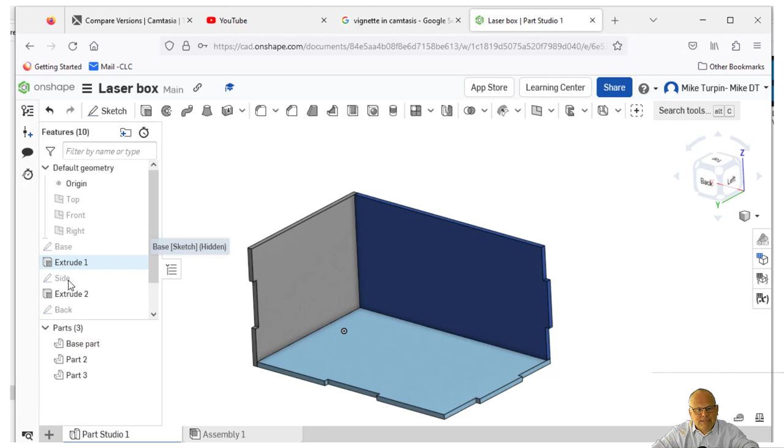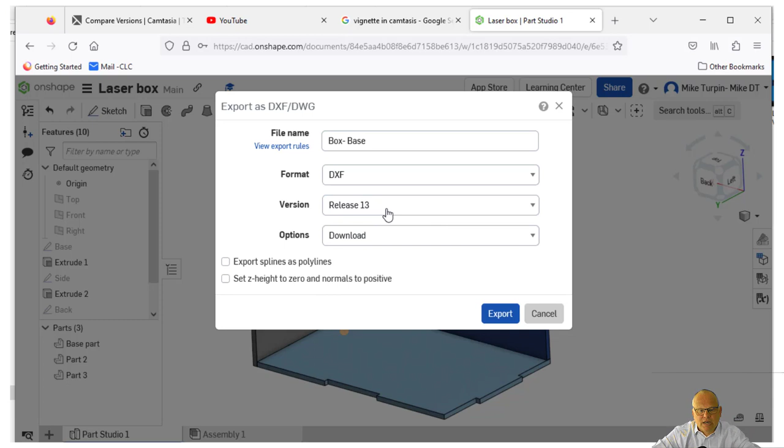If I want to use these 3 things, base, side and back, as my laser cut parts, I can go export as DXF. I tend to get rid of the part studio nonsense that comes through with it. Base, but you might go box, base, and you might sometimes need to just check which version you're using. I don't mess with that, and I go export, and then that becomes a DXF file that I can bring into a laser cutter. I might put that into a second video at some point,